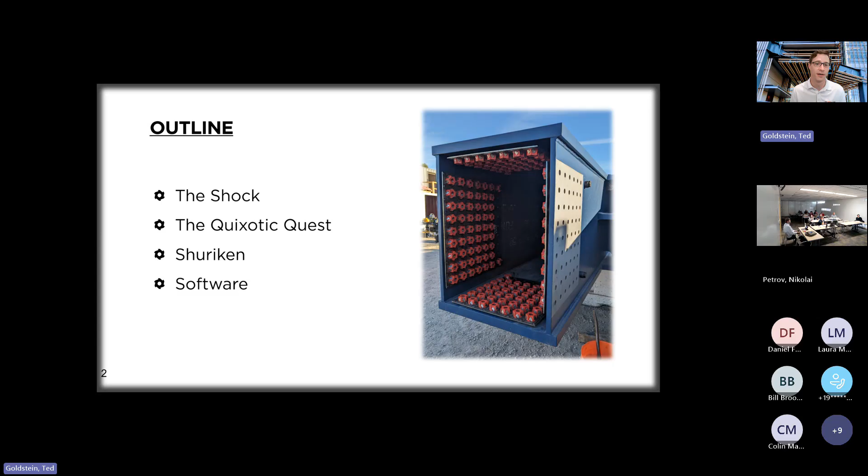To set the scene, for several years I had been working as a consulting engineer in New York, mostly working on buildings. Around 2018, my wife got a job opportunity over in Japan, and we decided to go over there for it.

In truth, I wasn't too thrilled with it at the time. Between licensure and language, it seemed like I was going to be an unemployed structural engineer for the foreseeable future. It was a bit bittersweet, but it turned out to be a really eye-opening experience.

When I was working, and I think this is true of a lot of people doing a lot of work, you kind of assume that the stuff you're seeing, since you've been doing it for a while, you've seen it all. So specifically in this case, I assumed that since concrete is the same and steel is the same in Japan, then structural engineering is also going to be the same. That turned out not to be the case.

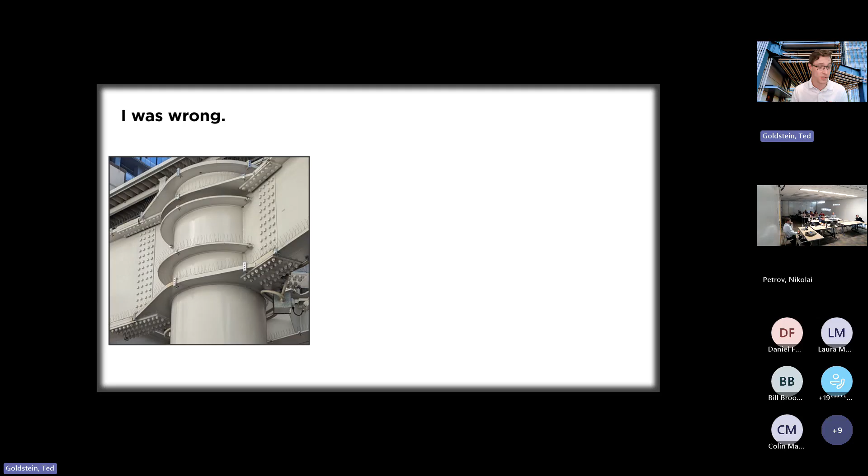I'm going to throw up a few images here of some interesting structures just to set the scene about how different it can be. Here, for example, is a big old moment connection at a major rail station. Obviously very different than how we would do something like that here. They've got all these diaphragm plates cutting through each other at every height of every beam going into the column. A lot of round columns too, also something we don't really see in the US very much.

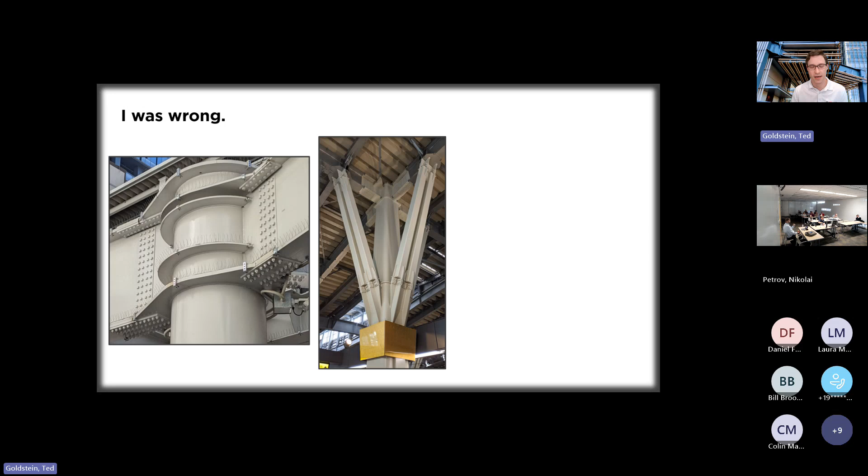Here we've got some double BRBFs, again at a large train station, going very steeply up to a moment frame supporting the roof, very different from anything I had seen at the time.

So totally different than anything I'd ever seen in the U.S. Steel is the same, concrete is the same, physics is the same, but that doesn't mean people are going to do things the same way. It's actually funny, in this particular example, I spoke to a Japanese structural engineer who explained to me that this was often done as a value engineering option for buildings, which to me was hard to even believe.

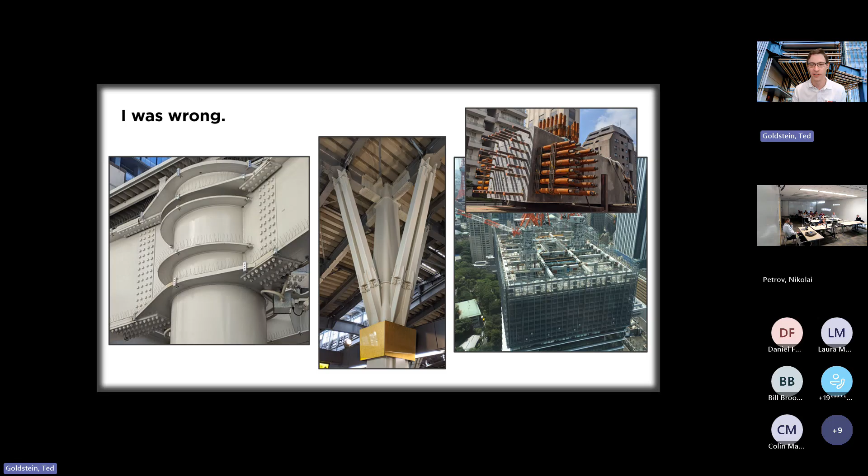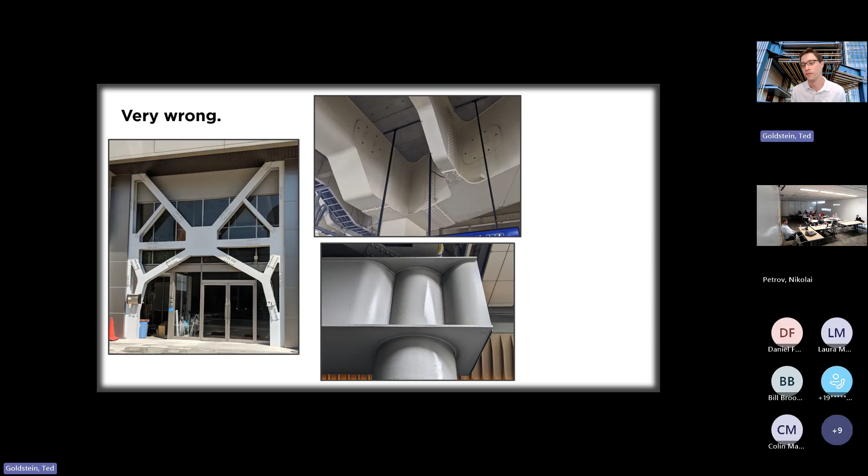And then I threw this one in, not because it's terribly representative of any particular aspect of design and engineering over there, but because it had a certain je ne sais quoi to it. I can't imagine ever seeing a connection like this done this way in the US. When you really step back and look at what they were trying to do, there is a certain method to this madness, but it's a very different madness than we would probably put into place here in the US.

So really, seeing all this definitely gets the imagination going, gets you thinking about things in a way that - at the time I'd been working about 8 years - it was sort of tempting to start to think you'd seen it all, and clearly you hadn't.

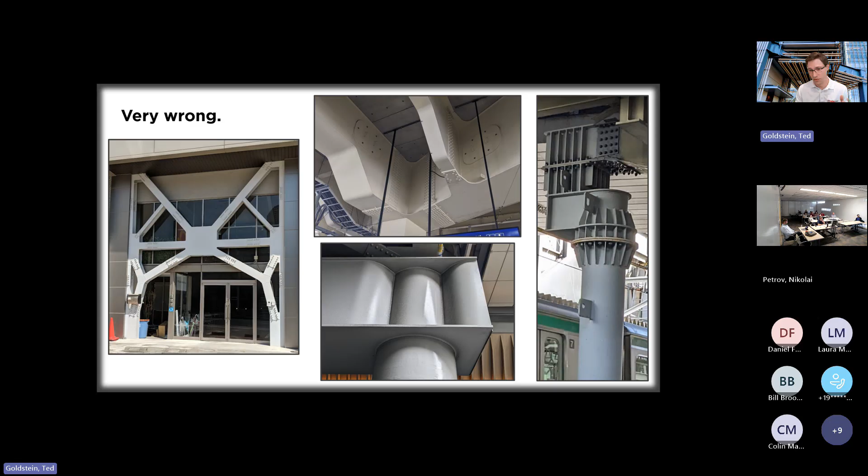Now, all the stuff I've been showing so far is, well, there's the retrofit on the left, but for the most part infrastructure, just because that's where things tend to be left open to view, so it's easiest to see structures and compare things there. But my background is in buildings, and that's no less interesting a place to examine, and that's what we're going to look at for most of the time.

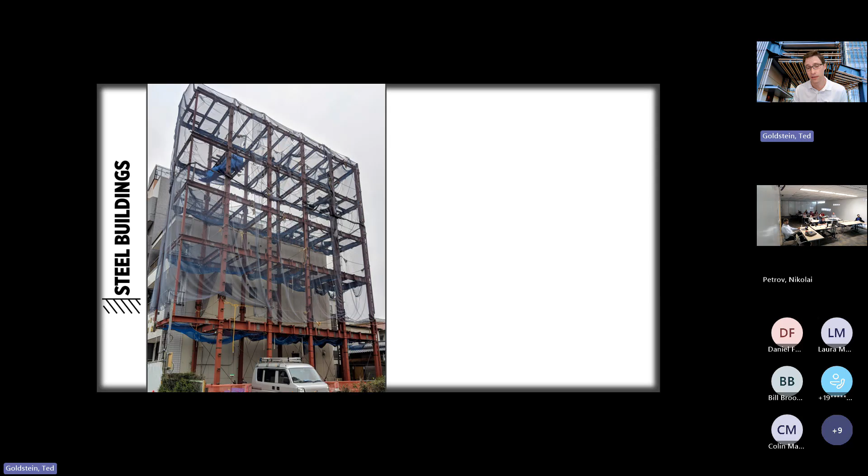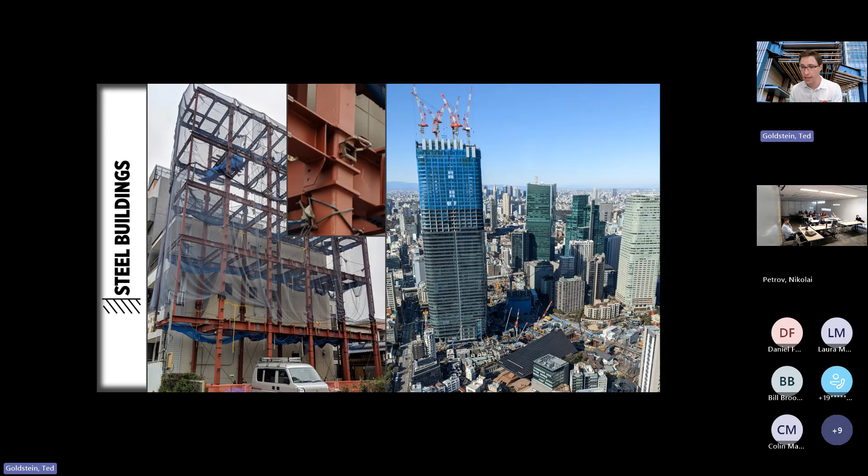For the building on the right, because of the state of completion it was in, I don't have a great shot of one of those joints specifically, but here's another example of a column from a high-rise project, maybe not quite as large as this one. Again, we've got an HSS column - when they get very big, they go to built-up boxes, but almost always square and hollow.

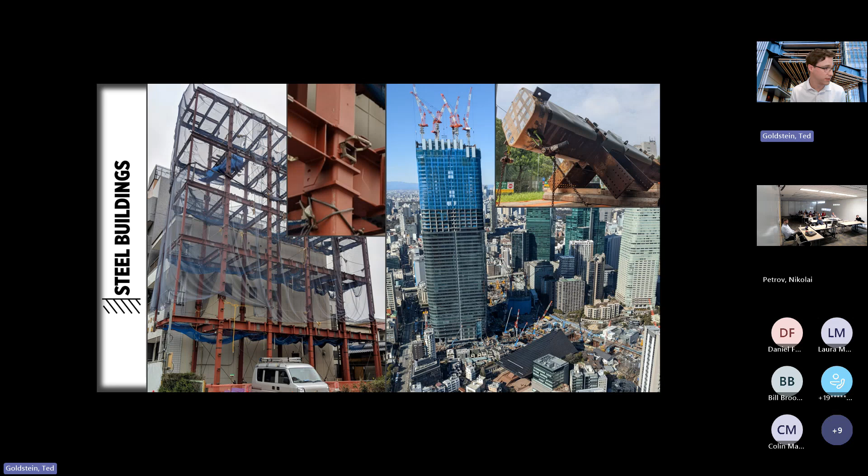They've cut that column into multiple pieces in order to slide diaphragms into them, re-weld the column, attach the stubs, and then splice those stubs to beams in the field. So with that, let's compare this with what we tend to do in the US.

In Japan, we've got distributed lateral systems where basically every column is taking part in the lateral system, and indeed every beam that is on a column line is part of it as well, which means there are no gravity columns - very unusual from an American perspective.

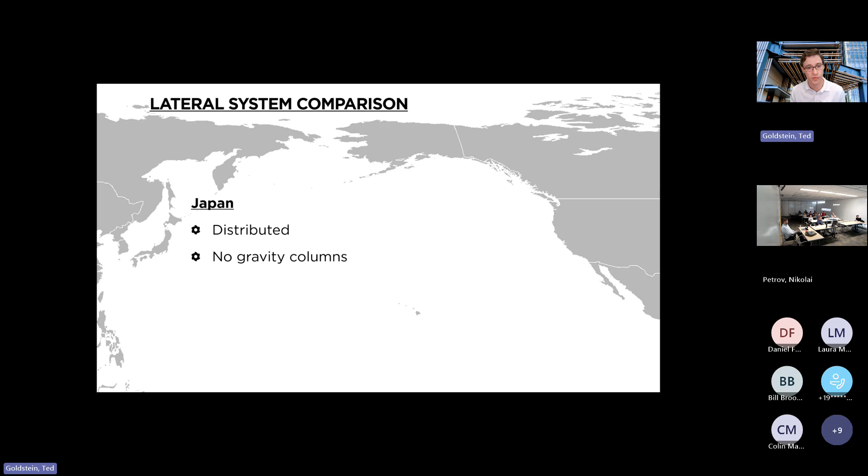Because you're distributing load over so many more connections, you tend to have more but smaller lateral connections from beam to column. This is in a relative sense - the seismic loads in Japan are practically off the charts, so the connections may not actually be that much smaller than we're used to seeing in the US. Of course, Alaska has very high seismicity as well, but from a national engineering community standpoint, they tend to have larger forces.

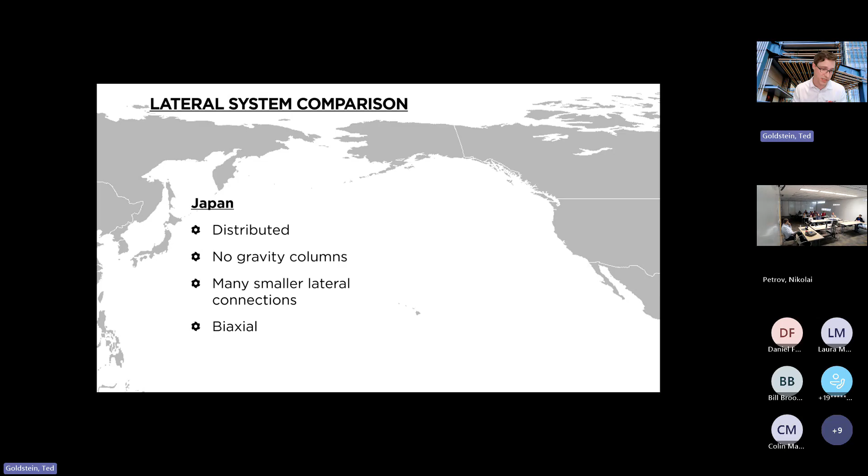And then the last thing is, of course, these frames are biaxial, right? Every column is not only participating, but it's participating in both the X and the Y directions.

In the US, on the other hand, we tend to have concentrated lateral systems - whether that's a core in a high rise, maybe some outrigger trusses, concentrating that function of moving the overturning moment out to the perimeter of the building, or in our shorter buildings, we tend to want to keep our lateral systems on the edges. Usually the idea is to reduce the effect of accidental torsion. These are obviously generalizations - there are plenty of buildings where this is not true, but more often than not, this is what we tend to see in the US.

As a result of that, we have a lot of gravity columns in our buildings that aren't participating in resisting lateral loads. That means the fewer connections we do have tend to resist more force. We also tend to separate X and Y - we'll have a frame that does one direction and frames that do the other, but generally they don't interact. If you have a core in a high rise, that acts as a tube and takes force in both directions, so that last point tends to apply more to shorter buildings, but it's a characteristic we see often.

We've got two very different ways of approaching basically the same problem: make a steel building that doesn't fall down when you push it sideways. There are a couple ways to look at this. Maybe the simplistic way is to say, well, they're doing it wrong - that's not terribly satisfying, there are plenty of smart people over there. The other way, equally unsatisfying especially sitting in our seats, is to say we're doing it wrong, and you too, Hawaii.

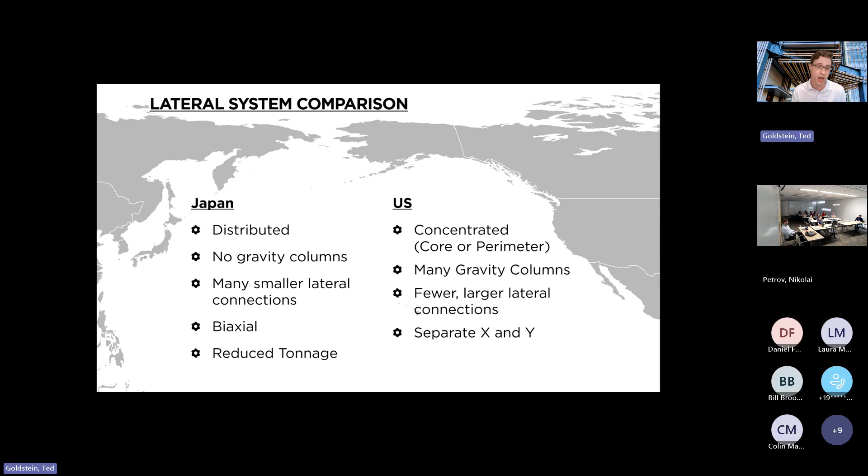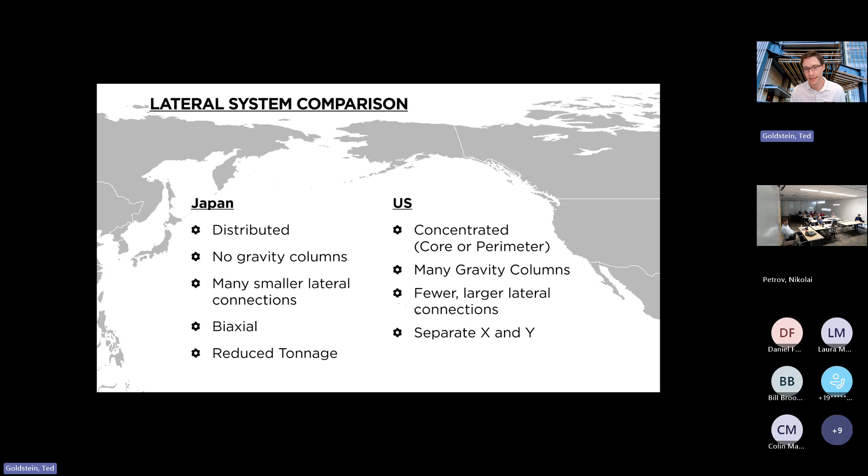When I was looking at this, I focused on mid-rise or lower-rise buildings where we tend to separate our X and Y lateral systems. In those specific cases, there seemed to be a pretty strong argument that the Japanese approach would allow you to reduce the tonnage. Of course, it comes with more connections, so cost is a much more complex thing than tonnage. But with an increasing number of projects concerned about sustainability, the best thing you can do to reduce the impact of a project is to reduce the amount of stuff you use. That's what got me focused on this approach, and really started what I'm calling the quixotic quest to see it get wider adoption in the U.S.

Just to illustrate this point, I want to look at a conceptual building. This is very much qualitative, and conceptual - it's inherently oversimplified as I go through this. Really just an attempt to describe things in a graphical way. Am I missing some details? Absolutely. But I hope that by running through this, I'll be able to get across the way I was thinking about it at the time, for better or worse.

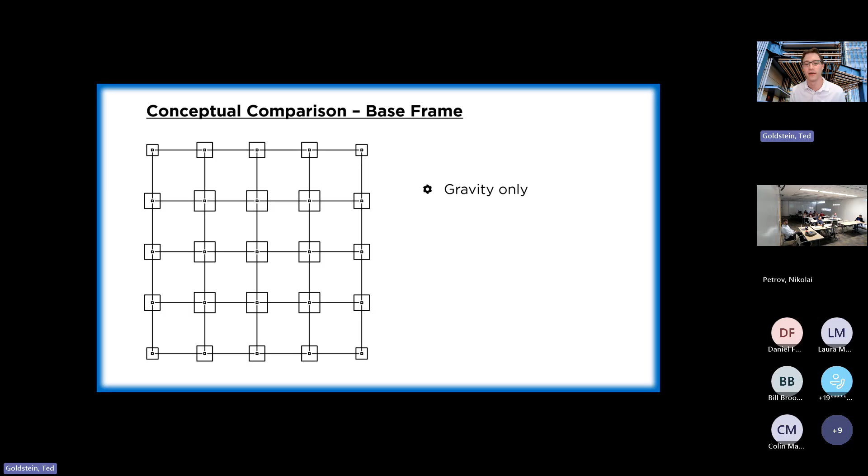So we can imagine, what if we designed a building - say a 5 to 10 story building with a very regular grid. In a conceptual example, you don't have to worry about people getting between floors, so assume everything's perfectly regular, and we're designing it for gravity only. If we design for gravity only, the footing size and column size are going to be relatively proportional - the tonnage in the column and the area of the footing are both relatively in line with one another. So we can use that as a graphical tool for understanding how much capacity we have and how much material. I'm treating the footing size here as a graphical representation not only of the foundations, but also of the material in the columns.

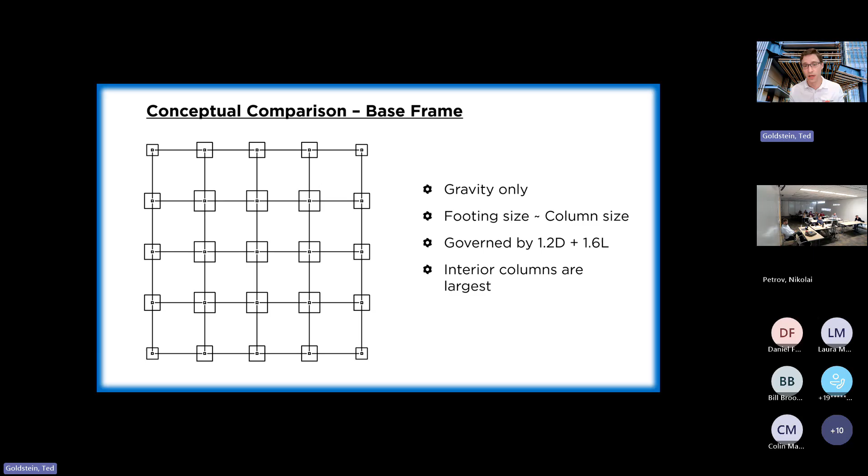If we design this for purely gravity load, then these footing designs and the frame design are going to be governed by the 1.2 dead plus 1.6 live combination in LRFD. The interior columns will be the biggest because they're picking up the most floor area, slightly smaller at the perimeter where you've got half the floor area plus some facade. The columns at the corners will be the smallest, with the smallest floor area, but they have the same amount of facade as the perimeter columns.

So we've designed it for pure gravity loads. If we now look at the lateral load combination - I'll say the wind load combination, but it really doesn't matter whether it's wind or seismic. I put wind here because wind happens everywhere, but seismic does not really.

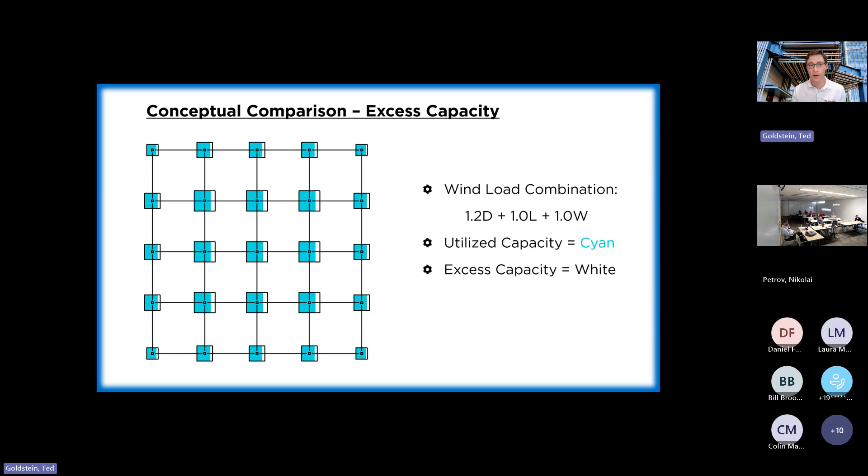But if, before we've applied any lateral loads to this structure, we were to look at that lateral load combination, the live load factor has gone down from 1.6 to 1.0, and the wind load doesn't exist yet. What that means is that all of these elements, the columns, the foundations, and the structure, are now loaded below 100% utilization. That aqua color is meant to illustrate, qualitatively, the amount of capacity you're actually using in these columns and foundations, and we can see there's some extra capacity in white.

So now if we go ahead and start applying some lateral loads, let's produce a lateral system, we can moment connect all the columns. I'll look at the distributed approach, what they do in Japan first, because it's a little simpler. If we started with zero lateral load and gradually applied it, like someone pushing on the side, when those loads are small we won't have to do anything beyond make the connections to resist them. Nothing needs to be upsized, because all of these foundations, columns, and beams have extra capacity from that lower factor on the live load.

We can look at this graphically. If we introduce a wind load, represented by this red box (oversimplified, just to get the concept across), part of that wind load will be taken up by the excess capacity we have in the columns and foundations. If we take all those white rectangles from all the foundations and stack them up, that's the amount of load addressed merely by utilizing that extra capacity. What's left is the amount we'll actually have to add material to resist. The nice thing about a biaxial system is that if you add the material needed in the X direction, you've automatically taken care of the Y direction. This case is unusually symmetrical, but the general concept is there.

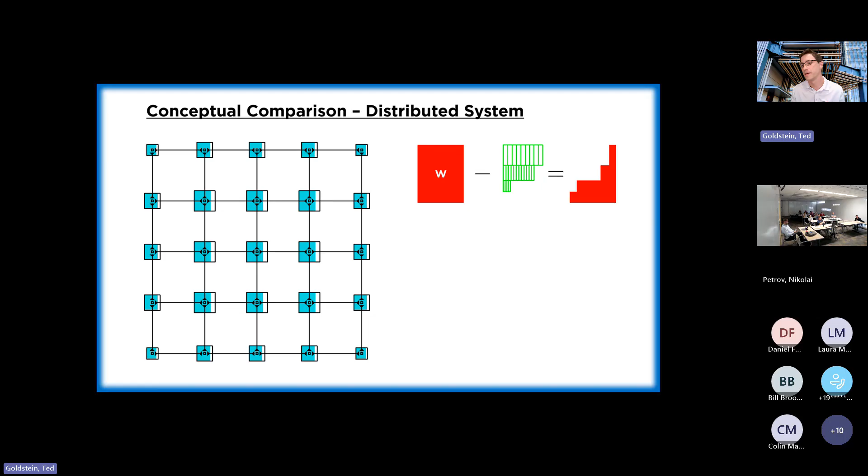So that's the distributed case.

Now let's look at what we often do in the US. I don't know if it's a majority of the time, but it's certainly common to see buildings laid out like this, with a lateral frame on the perimeter, with separate X and Y directions. Sometimes the corner is incorporated to make the frame wider; sometimes engineers leave it out because it's harder to resist uplift there with a smaller footing. For this conceptual comparison, it won't really matter.

But suffice to say, if we take this system and apply wind in the X direction, we'll still have some excess capacity before adding material, coming from those footings, but it'll be a lot smaller than before. So pretty soon we'll have to start adding material to those frames to resist lateral load in that direction. We can do the same for the Y direction, but in this case it's a totally different set of columns, foundations, and beams participating, so we'll need to add material to them separately.

So for comparison, that's the distributed system above, and the sum of those two blocks is the discrete system we often use in the US below. Again, I can't stress enough this is oversimplified and qualitative, but I think it gets across the point of how using members in two directions is helpful, because you don't have to build essentially two lateral systems and add the material for that.

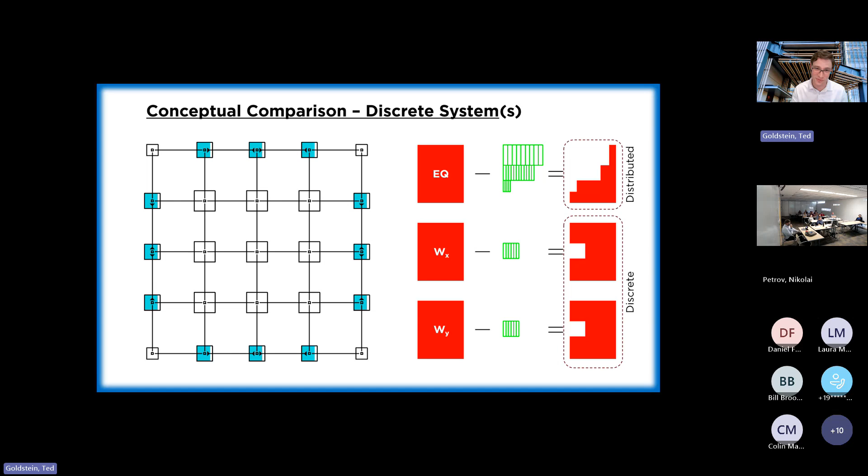I want to emphasize that just because this is a useful system in this specific example I'm bringing up, doesn't mean it's justified to be used in practically every building the way it is in Japan. As a case in point, I have some fun images of when maybe it was taken a bit too far. I'm not sure that those books or that playground equipment really required them to cut the columns into pieces and put diaphragms in there and make full capacity moment connections. But such is the allure of the familiar, right? That's how they tend to build things, and so that's how they do it.

Certainly not suggesting that we are any more guilty of it than anyone else, but it's a normal thing to just kind of stick with what you're used to, even when there may be better options out there. So that essentially, for better or worse, is why I found myself figuring out how to make this system, if not a prevalent system in the U.S., at least an option that people can look into when the time is right.

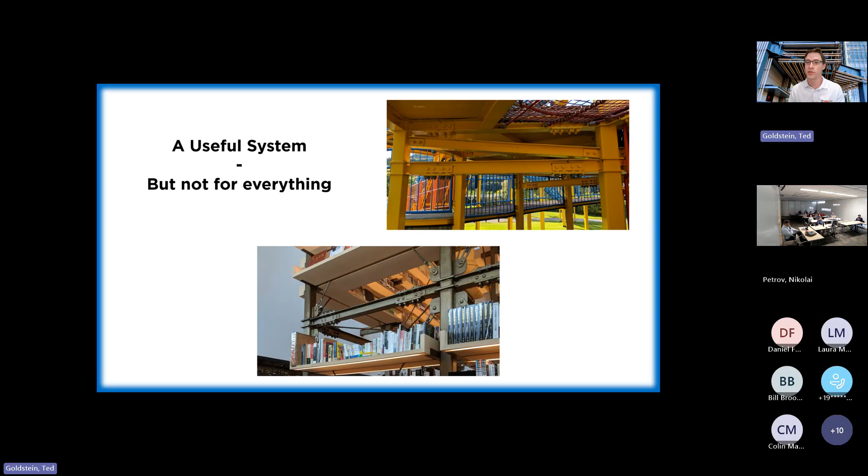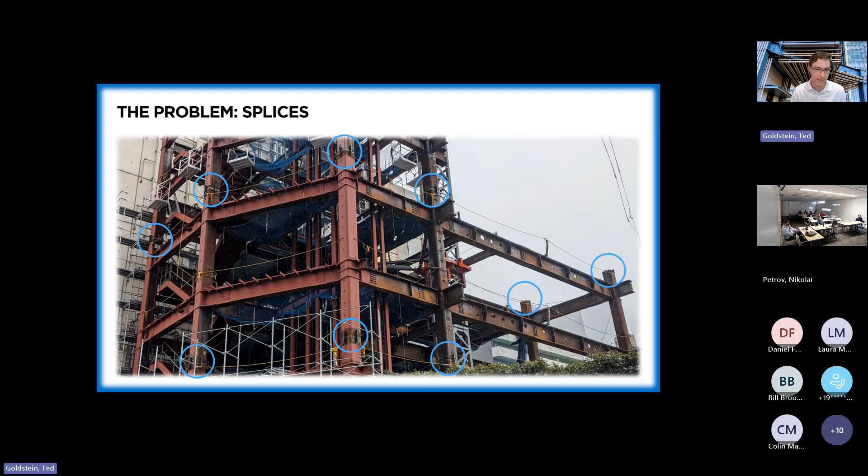But there is a big problem, and that is when it comes to splices. Here's another very typical construction site in Japan. We've got all the features we've seen before: the HSS columns, moment connections, every beam at every level. But here we can see all the splices required in this system. And because generally speaking it's very difficult to bolt things together with HSS, or at least it was, these are all going to be welded splices.

Now, in some parts of the US where you're in very high seismic zones—and I'd be curious to know what the standard practices are in Alaska—I know in California there are locations where even if you have a wide flange column, there's a good chance you're going to be welding the splices. But for the majority of the country, bolted splices are the way to go. And if you say, hey, there's this great new system, but by the way you have to weld all the splices, you're kind of likely to get laughed out of the room.

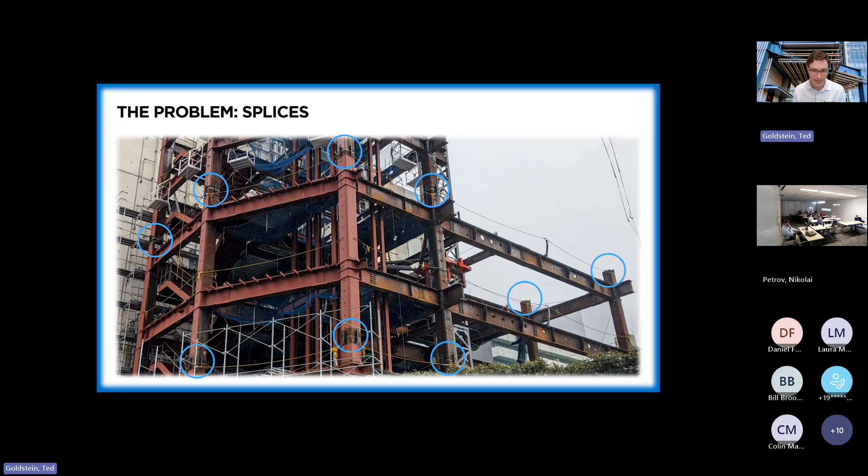And so that's what kind of got this quest going, to a certain extent—maybe that's overstating it—but this hope to find a way to utilize bolted splices at these locations, so that the benefits this kind of system has in certain situations can be realized over here.

So if we look at what a bolted splice for an HSS column would be, it's not so different from a wide flange. In this case, I'm showing it with splice plates on the interior. They could just as easily be on the exterior. But the nature of the problem isn't really changing, right? You don't have access to the interior of the tube, so how are you going to get a bolt in there and get it tightened? Of course, usually we're using TC bolts, but even with a TC bolt, you might tighten it from one side, but you still have to insert it from the other side. So the challenge remains.

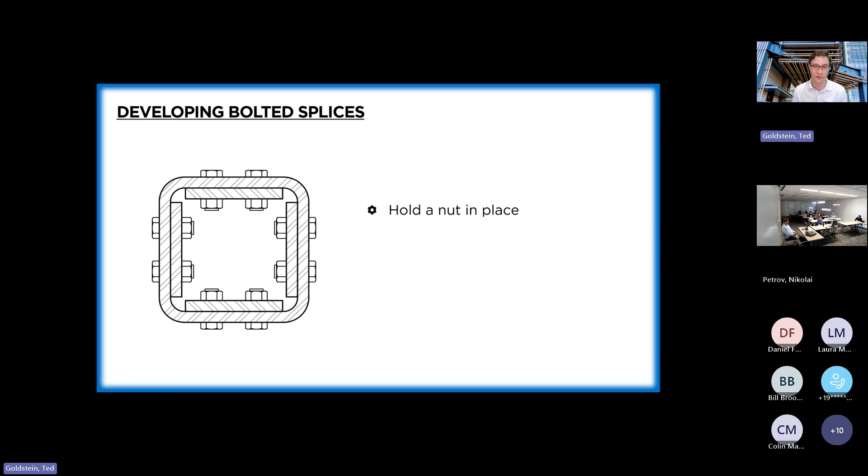So, some basic features of what you need to achieve this: obviously you need to hold the nut in place—Nikolai was talking about tack welding nuts, we're going to touch on that a little bit later. That's the most basic requirement. You also have to resist torque from pre-tensioning. If you're primarily thinking about column splices, even if the code does not strictly require them to be pre-tensioned, most engineers are going to want their column splice bolts to be pre-tensioned.

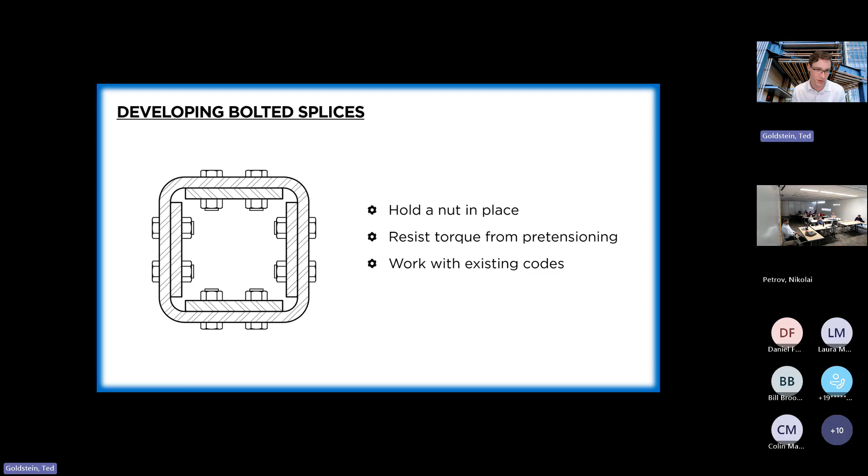And you want it to work with the existing codes, right? There were already nut holders that existed for sheet metal and automotive and things like that. But they tended to do things like have extra layers within the plies of the connection that don't really work in the structural world.

And lastly, we have to allow for erection tolerance. That goes back to that example of tack welding a nut. One of the beautiful things about bolted connections, aside from being faster to assemble, is they've got a lot of tolerance compared to welded connections. So it's much easier for erectors to get things to fit and get those connections finalized when you have that tolerance.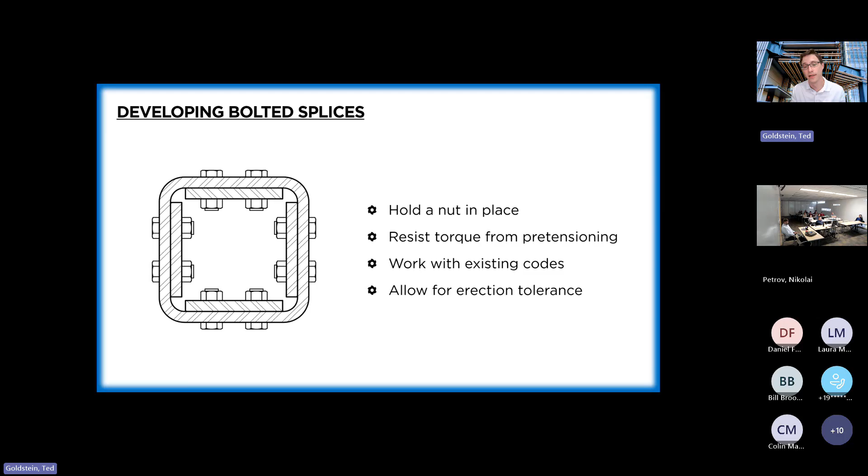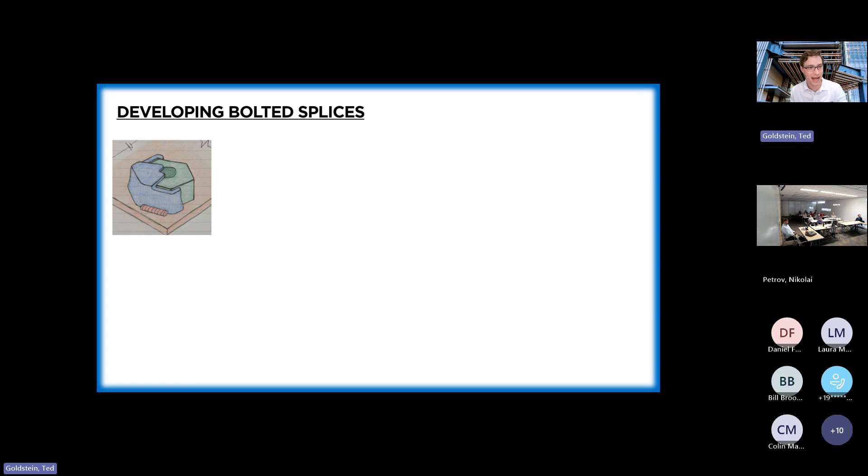So with that, we went from the basic concept through a whole bunch of inadequate ideas. Essentially, we started out with drawings, which gave way to models, which gave way to patent images and that sort of thing. Cast steel gave way to sheet metal. And with each iteration, you bring up new problems that you have to try to figure out how to deal with.

The one up here is one of my favorites because of how ridiculous it is. The idea was to let that part in the middle move for the tolerance. But when you start putting torque on it, those kind of squiggly parts will straighten out as you resist the torque. The problem is that if the person inserting the bolt pushes too hard, it's just going to move upwards and the nut will fall out.

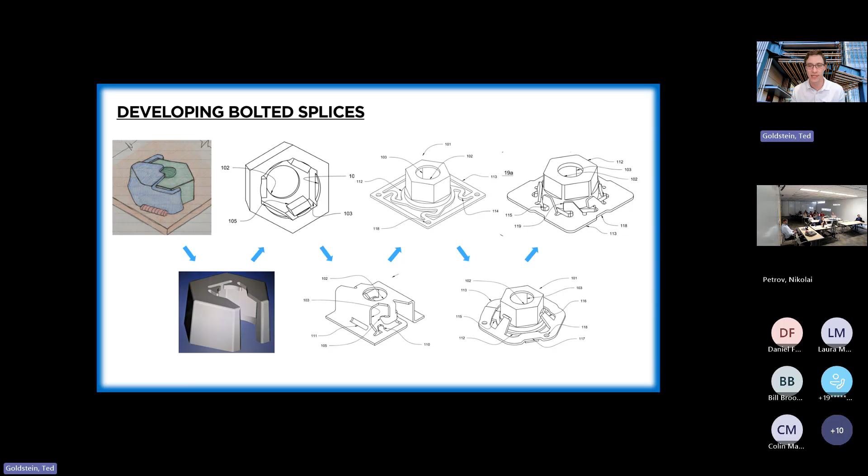So each of these is an effort to address the shortcomings of the previous one. We went to two pieces, and then finally that piece in the center went from being a steel sheet metal piece to an injection molded piece just for manufacturing reasons. At that point, I had conceptually arrived at the geometry that would eventually become Shuriken.

So I'm going to move away from the narrative now a little bit and talk about Shuriken itself. I want to pause and note, obviously this is a product we sell, it's a product I manage, so it's difficult for me to be 100% objective. I do think it's very useful, but I want to acknowledge that while this is a great tool to have in the toolbox, it's far from the only one, and it doesn't mean it's the right choice in every situation. I'll touch on that more towards the end.

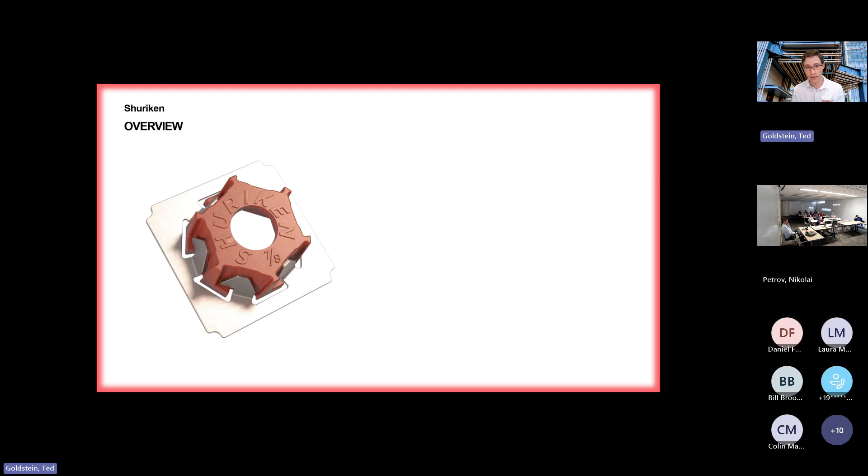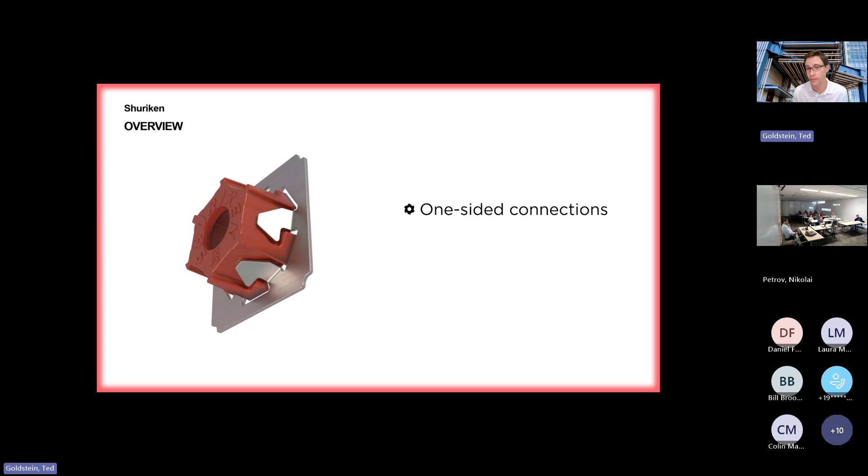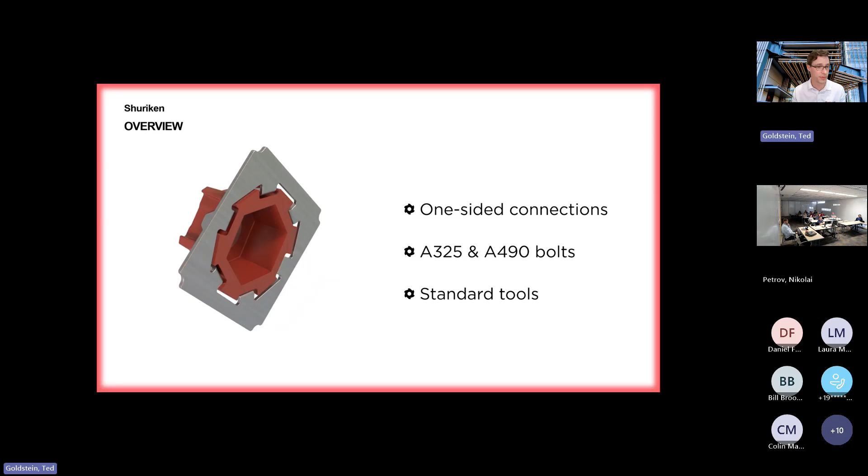But with that out of the way, a bit of an overview of Shuriken. As we said, this is a way of making one-sided connections when you can't access the interior, specifically originally talking about column splices. Because you're just holding a standard nut, you can use standard bolts, A325, A490 bolts. They can be fully pre-tensioned, and once they're in the field, the erector is going to be able to put things together with standard tools.

So how does it work? Basically, it's kind of like a one-time use wrench, one of the best ways to think about it. You have a socket, like in a socket wrench, that's going to hold the nut in place in that cap in the center. The teeth in the cap interlock with tabs in that steel ring around the outside, and then it gets tack welded down to whatever you're working on.

So when you apply torque to the nut, that's going to twist the cap, and it's going to get resisted by those tack welds. The other thing we'll talk about in a bit is how part of that steel ring, those tabs, are flexible, and that's the part of it that allows for tolerance in the connection.

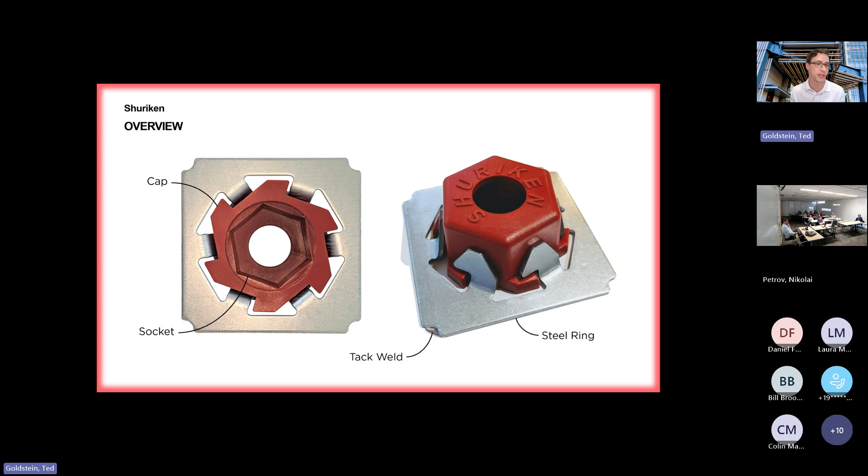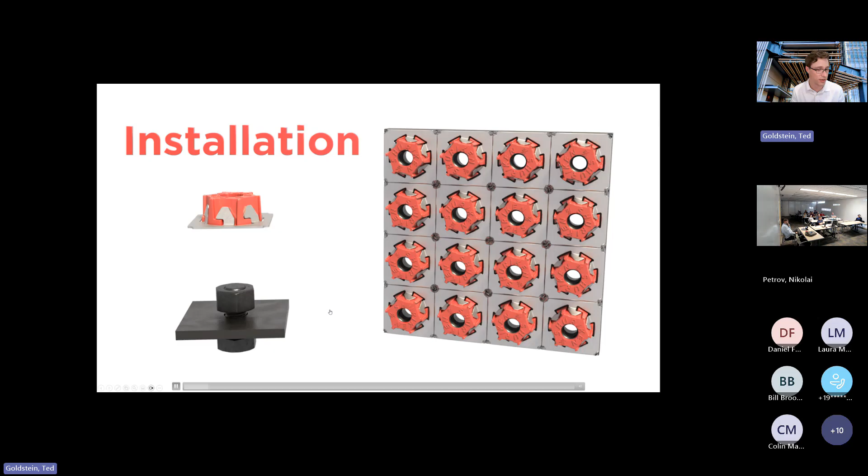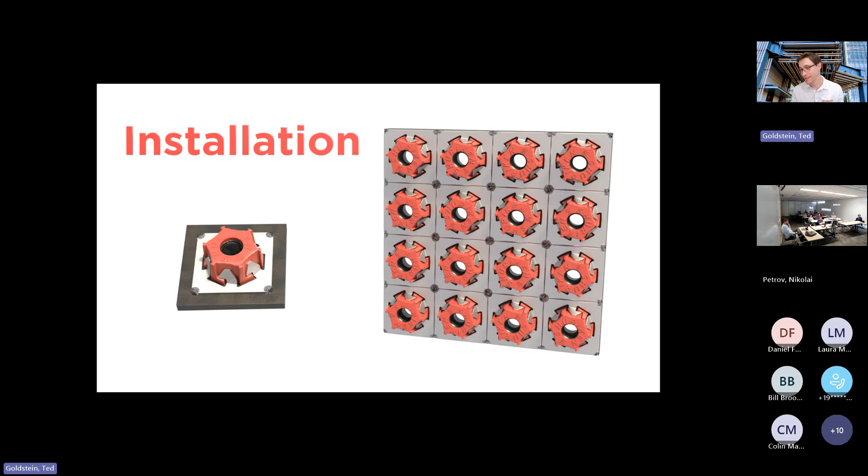I'll do a brief video here just to show you how they're installed and the basic connection geometry. Essentially, we're going to hand tighten the nut and bolt in the shop just to get the nut in the right spot, roughly over the hole. Tack weld the four corners of Shuriken, and then you can pull the bolt out, and now you're adequately centered because of the adjustability, so you know it's going to be in the right place.

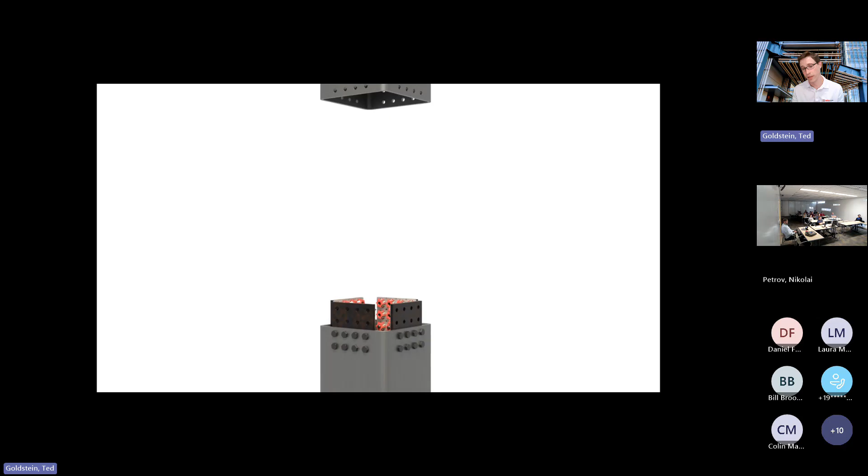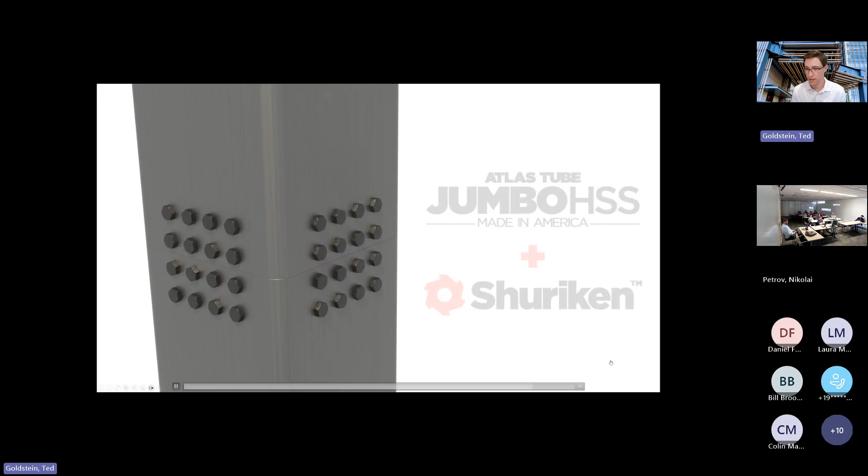At that point, once you've fabricated the plates, you can slide them into the tube, shop bolt one side, and then in the field, when the next portion of the column comes into place, drop it on, and you can field bolt the other side. That is, in very broad strokes, how it's used. So, move on to the next slide.

Okay, so configuration, just a bit of technical detail to get out of the way. We just saw the left side of this image was the Shuriken getting mounted with the nut on the inside. We're fastening two or more plies of material, and then on the right side we have the bolt. If it's a snug tight connection, the bolt is all you need. If it's going to be pre-tensioned, then we need DTI washers, strongly recommended in order to verify that tension from the outside.

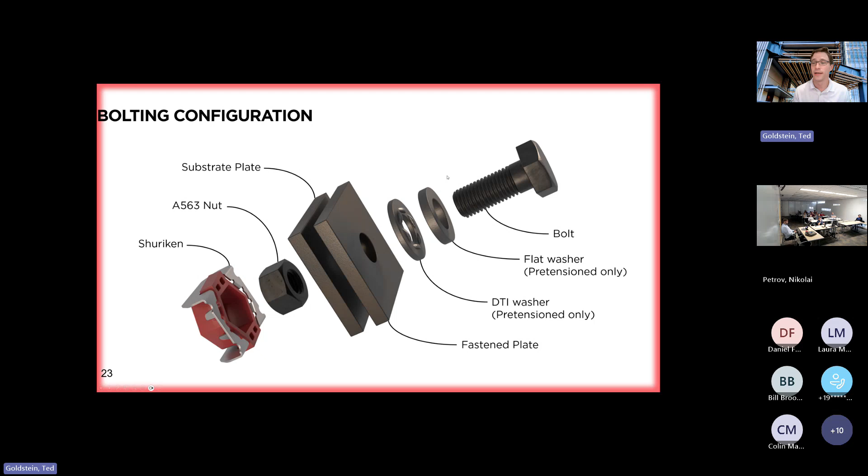So we talked about tacking nuts. It's one of the most common questions that comes up, so I want to address it here preemptively. A few things to consider when we look at taking that approach. First of all, the code is complicated. I think there's this conception that the code does not allow you to do it. It's not quite that cut and dry.

If you look, for example, at Design Guide 21 from AISC—it's funny, actually, it's called a welding primer for engineers, but it's like a 300-page primer—they actually have a section on welding nuts and bolts, and they do give guidance where if you really had to do that, you could do it.

There are best practices to do it properly, but the problem is that it's pretty onerous. You've got to preheat, but make sure it doesn't get too hot, use a particular type of electrode, and not put too much material down at once. In the end, if people are tacking nuts in a shop, they're not going to do all this stuff, and if you don't, the result is you get a brittle weld. So if you're in the field and things are not quite fitting, and that nut pops off because the welds are brittle, you're going to be in a difficult situation.

With the Shuriken, you have that sheet metal cage, which is a much more ductile attachment. It could get deformed a little if people are particularly vigorous in getting the bolt into place, but it's not going to get knocked off.

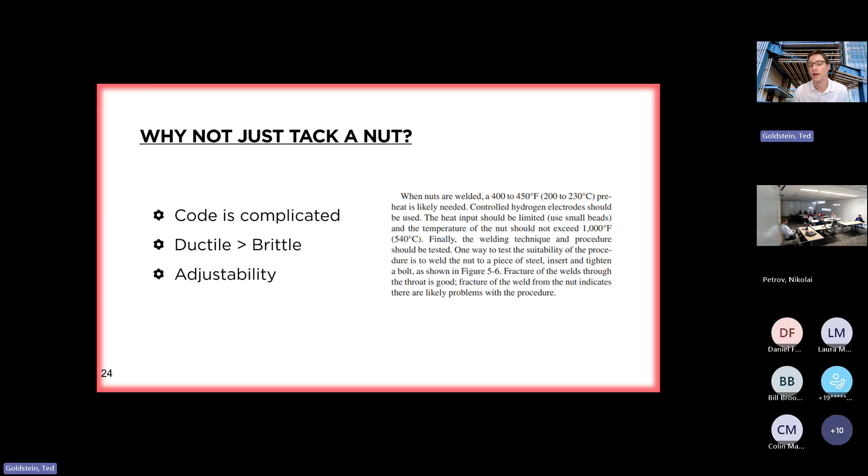But the biggest issue is adjustability—being able to make sure that you don't need things to fit perfectly together in order to get the connection to work. So here's an image of a nut where you can see the holes are not quite perfectly aligned. The Shuriken itself is also installed a bit to one side. But in a situation like this, an erector can stick a spud wrench in there and just push it whichever way it needs to go.

So the idea here is to always have enough flexibility that regardless of which edge of the hole it was installed on, or which edge of the hole the bolt is coming in, you're going to be able to thread the two together.

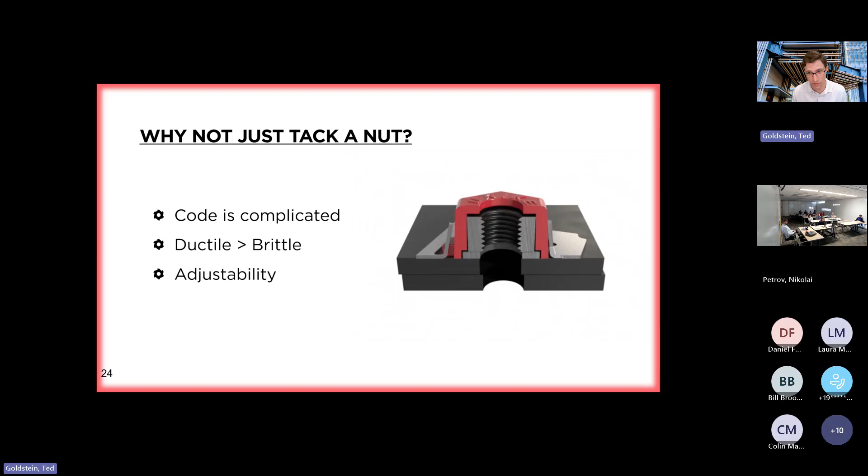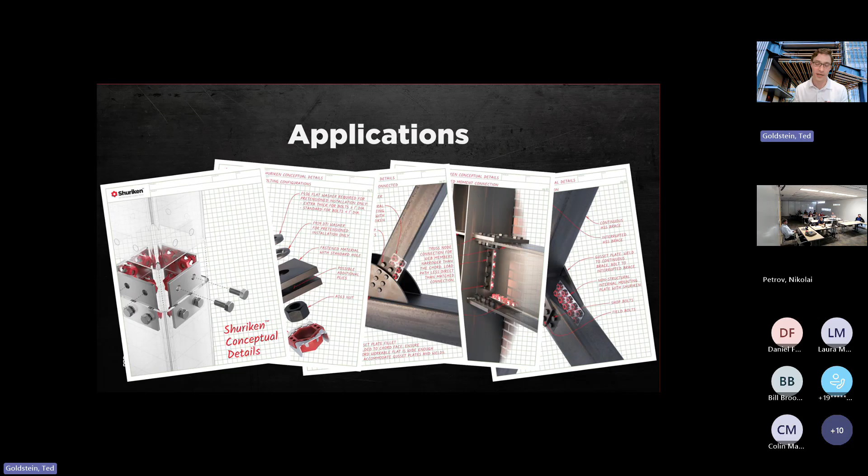Now let's talk a little bit about some applications. Up until now, I've been talking all about column splices, and for the longest time that's really all I was thinking about, and even after Atlas Tube became involved, that's all we were thinking about with this product. It feels almost silly in retrospect, because thanks to the inventiveness of the engineering community, we've learned so many other ways to use it—you find yourself constantly saying, why didn't I think of that? But with that in mind, I want to share a few different ways you can use it, just to get the imagination flowing.

So I did talk about columns—I'll cover this briefly. If you're doing a column splice design, there are a few considerations: gravity versus lateral. Obviously, if it's a gravity column—and let's face it, we have a lot of those in the US—you're really just designing the bolted connection to hold things in place and make sure things don't slip, because the vast majority, if not all, of the load is going to be transferred from the upper column to the bottom column through bearing.

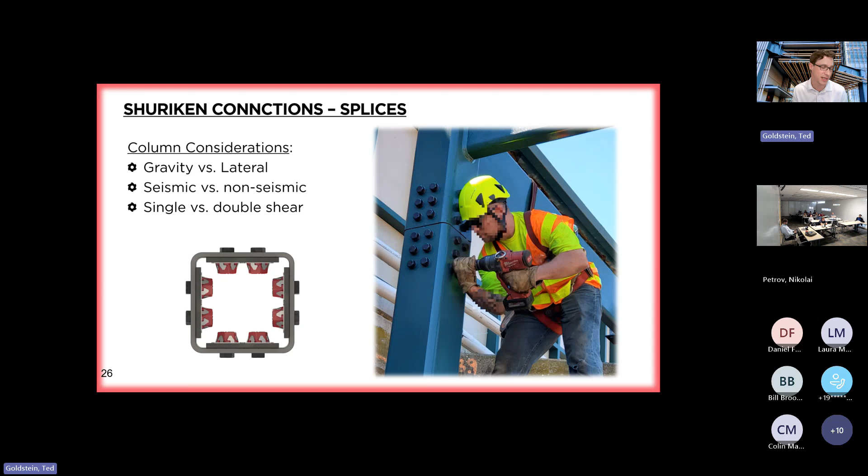Obviously, for a lateral connection, if you have moment or even tension in the column, at that point the bolts are going to be doing much more of the work, and so you may end up with more bolts, as in the example on the right, where we have a column that's part of a moment frame. And then the last thing is single versus double shear—we'll see in a minute. There are a lot of different ways you can go about making a splice, with trade-offs in terms of how easy something is to fabricate, how much material it uses, how good it looks, etc. So we'll look at those real quickly.

The basic one I showed before, the section where you have the plates on the interior, that's the single shear interior splice. That's kind of the workhorse of Shuriken splices.

If you have a case with particularly high loads, you can do a double shear version where you have a plate on the outside as well. It's more pieces, a little more effort for the erector, because they have to fit the column piece between 8 plates instead of just around 4. But you do reduce the amount of connection material, both in steel and in the number of fasteners and Shuriken. So if your loads are particularly high, this is a good option.

There's also a version for an exterior splice. The first two we looked at are great for columns or cantilevers, when you can slide a member into place along its long axis. Not so great if you have a beam, an HSS beam, with a connection at both ends, trying to drop it in from above, because if you have plates sticking out, you just won't be able to drop it into place.

In those situations, there are configurations where we attach the Shuriken to a mounting plate which sits on the interior of the tube, but doesn't actually cross the cut line between the two tubes. That holds them in place, and once the piece is erected, you can bring on the splice plate from the exterior and bolt it up.

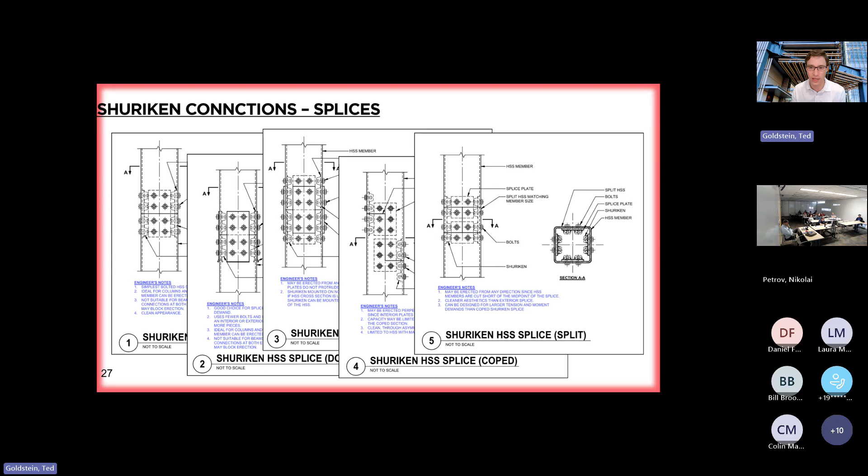There are a couple other approaches, big copes, where we have plates sticking out and cover them with C-shaped covers. These are less common, but all of them have trade-offs in terms of how efficiently they transmit forces, the maximum force they can handle, how complex they are to fabricate, etc. There are quite a few options based on the specific demands you may have, and we're happy to help choose the right one for a given project.

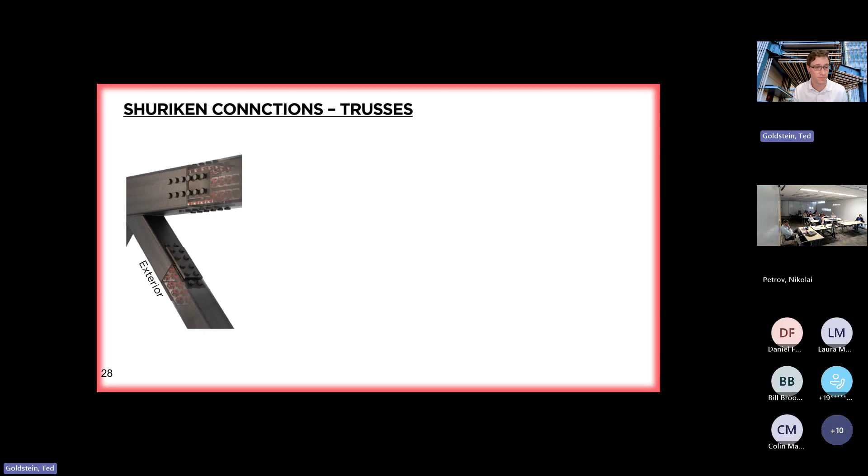A few extra examples: truss webs are a very common situation where we have that issue, where we can't slide things together if plates are sticking out. So we can do a truss web with the exterior splice. Here's an example where they did all 4 sides - covered splice, coped splice. I won't go into detail, but suffice to say, if you run into issues, there's probably a way to get around them.

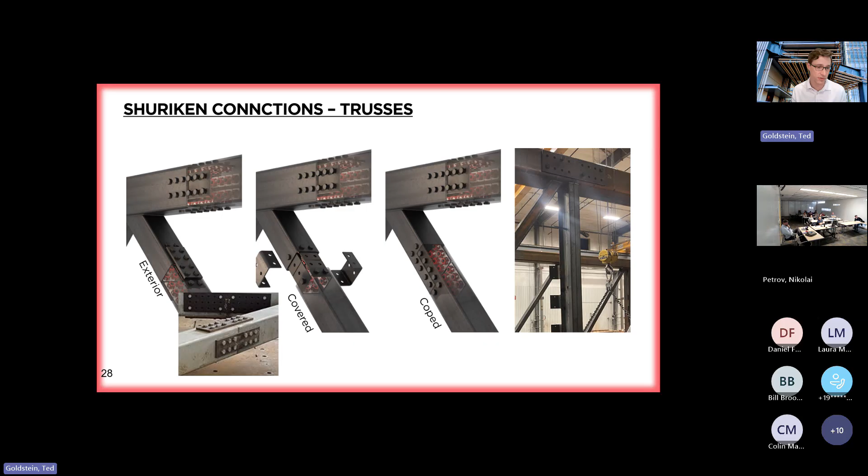One other approach, not really a Shuriken approach, but very clever, so I figured I'd include it with the trusses, is to go ahead and split your vertical member. In this case, this is a pedestrian bridge truss - they've got a vertical member right at the splice, and a channel on both halves of the truss that gets bolted together through its web. So there are always alternate methods as well.

Here's an example of one of those trusses. You can kind of see, if you can see my mouse - the chord splices are basically column splices on their sides, and they use that exterior approach for the webs. This is an overpass of a very wide freeway in Texas.

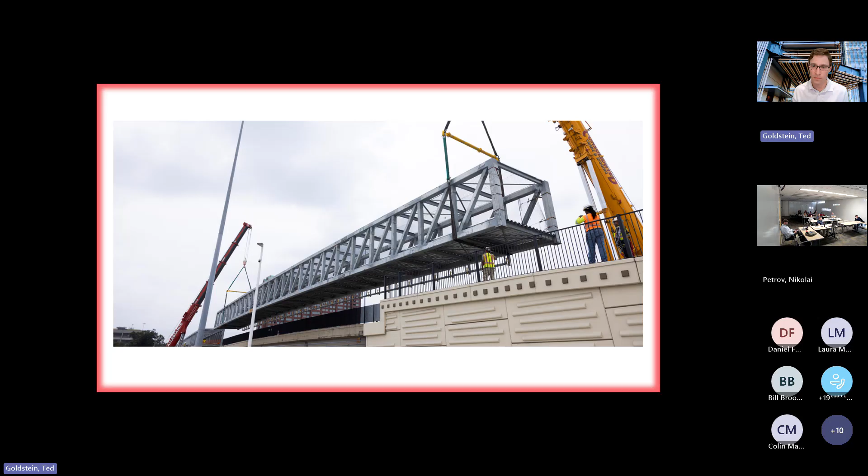Beam connections - I won't go into much depth here, but again, we have a book of conceptual details, as well as some more rigorously engineered typical details that we can share with you guys. Suffice to say, there are a lot of different ways to make a shear or moment connection if you don't have access. It's going to be based on the level of force, whether there are aesthetic requirements, whether you need the tube to be sealed, etc. So there are different options based on what you need to achieve with the connection.

One thing I'll point out on the right side here with the moment connection is we do have that mounting plate I mentioned earlier. You would put together this plate, which has 8 Shuriken on it with the nuts on the inside - it's not structural, it's essentially acting as a big washer. But by using 2 extra bolts, you can hold that plate in place. Once you've slid the beam in between these flange plates, you can go ahead and make the actual structural connection through those plates. So that's just a different way of holding things in place when you can't have plates protruding from the member.

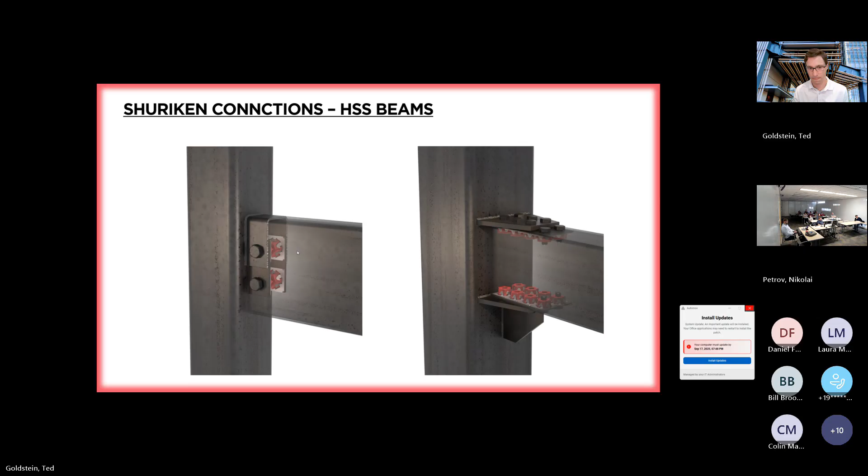One of probably the biggest examples of a why didn't I think of that moment was moment connections up against a wall. If you're in a tight spot and just can't get a hand back there, sometimes it's a lot easier to mount the nuts ahead of time and slide the beam in from the side than it is to potentially put big access holes or copes. Of course with a moment connection you can't put a cope. If it were a shear connection that would be an option, but regardless, probably easier to just mount the nuts ahead of time. It just makes things a little simpler.

And similarly, here's an example with a brace frame. We can't see the wall here because we're looking through it in the detailing model, but it just illustrates the concept.

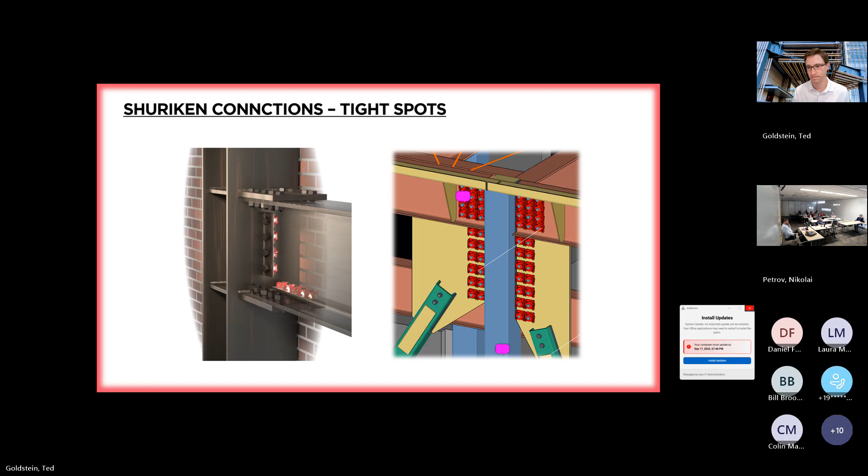So with that, I'll look at some technical concerns, things that are maybe a little different from a typical bolted connection, just to keep in mind if you have a situation where a shuriken seems like a good solution.

First of all, it's a wrench, not a fastener. It is essentially means and methods. To give an example, you could imagine, if not expect, a case where if you designed a bolted connection like the one we're seeing here on the right, instead of a shuriken, the steel erector just wants to buy a 40-foot wrench and drop it in from the top of the column. They can do that, right? Whether you use a wrench that's attached or a wrench that has a crazy long handle, it does the same job. So basically, means and methods.

We do say that engineers should spec them, simply because they're not 100% known at this point. And if you draw this bolted connection without showing the shuriken, the fabricator might think you're an idiot. But we may eventually get to a point where it's understood what you'd be looking for there.

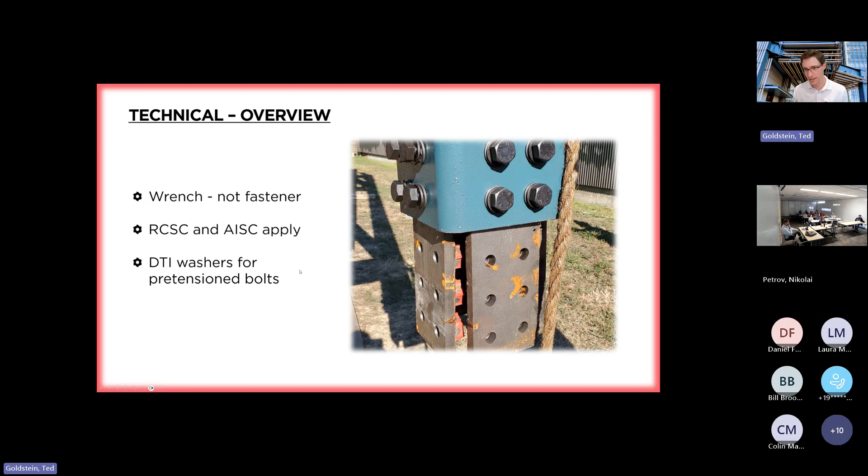So with that in mind, given that it is a wrench rather than a fastener, we're using standard bolts. You can see the A490 here in the photo. RCSC and AISC requirements for bolted connections all apply, and of course you can meet all those requirements. And then the last thing is, again, while we cannot tell the engineer what to do in terms of how they go about inspecting these, we do strongly recommend DTI washers rather than turn-of-nut, just because it's a verification method that can be done completely from the outside.

A note, if you're ever doing anything with a fatigue consideration: the shuriken is getting mounted with tack welds, and those do create a discontinuity. That's okay if you have a static load, but if you have something with fatigue, whether that's high cycle fatigue like in a road bridge, or low cycle fatigue like in a protected zone of a seismic assembly, we want to make sure those tack welds are not on the load-carrying members.

So in this case, essentially what we would do is mount the shuriken to a thin plate that is essentially neglected when the calculations are done. That way, when we sandwich it with the actual splice plate that's carrying the load, the tack welds are not touching the load-carrying part of the structure.

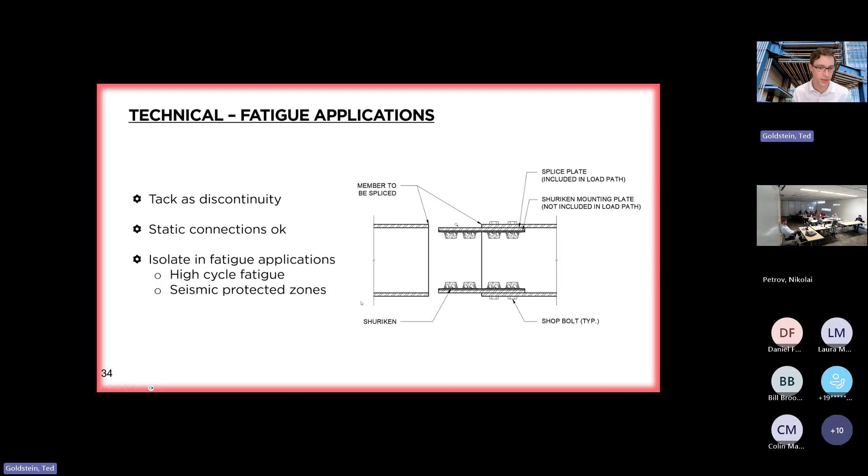A few notes just on detailing. When you're laying out a connection, we have to watch out for conflicts if we're doing something inside of a tube. Part of that is that the shuriken itself is bigger than a nut. Part of it is that we don't actually detail all that many connections that are in enclosed spaces, so often it's something the engineer or detailer may not think about.

It's happened to me more than once that someone will say we need to buy a bunch of shuriken, and I'll ask out of curiosity what they're doing with it. They'll send a detail, and I'll have to go, I think that's not going to fit. So definitely something to think about ahead of time.

For what it's worth, we do have plugins in both SDS2 and Tekla, the most common detailing software, where you can essentially pick two tubes and apply the shuriken component. It'll put all the materials in there, but it'll also check for these interior conflicts. If you'd like to do it a little more manually, we also have CAD files that we can share to help you when you're laying out connections.

Aside from that, edge distances need to be aware of. The shuriken themselves, at least the three sizes we have out currently, are all right about 3 inches wide, which means you need 1.5 inches edge distance, which is generally a little more than the minimum the code would require for those size bolts. So again, just something to be aware of as you're laying out the connections.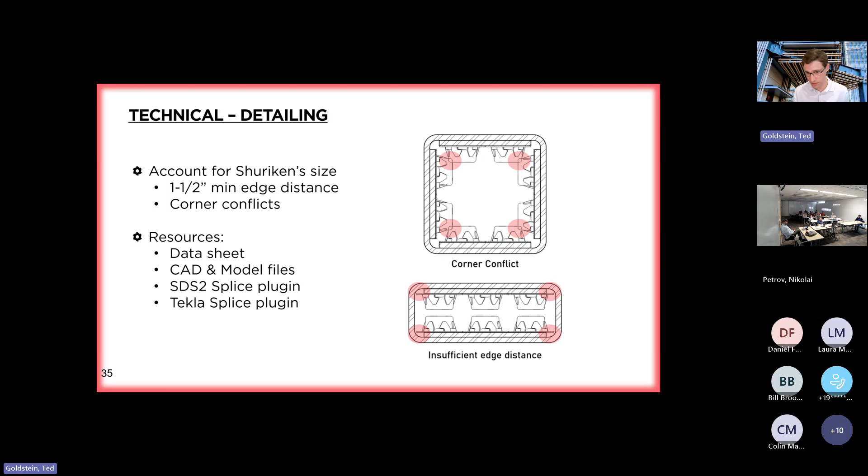And then lastly, just to give a sense of price and availability: we try to price these competitively because at the end of the day, Atlas Tube is an HSS company. The Shuriken is really just there to make it easier to work with the main product. You can see the three sizes we currently have available: 3/4 to 1 inch, and 5/8 and 1 1/8 coming available this spring. Just trying to fill out that size range.

Obviously, the 1 1/8 works when you have really big loads. The 5/8 is useful if you have a relatively small tube like a 4x4, where you don't have a lot of interior space. Obviously, 5/8 is not a very common size in the structural world, but in those smaller connections with less available space, it can come in handy.

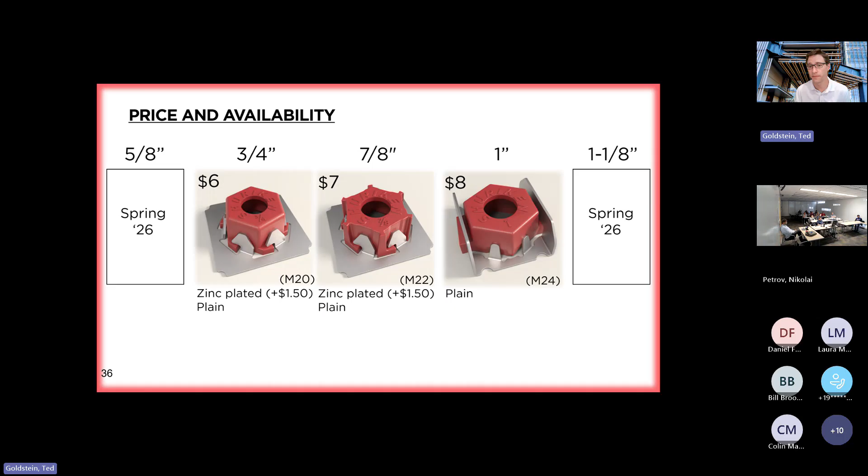So with that, I do want to return to what I said initially: Shuriken is a tool in the toolbox. It does help us solve some problems, reduce field welding, that sort of thing, but it's not the only tool we can rely on in those situations. For example, we have the hollow bolt from Lindapter and the blind bolt from the company Blind Bolt, both very viable options when you're making one-sided connections. Both have pros and cons compared to a standard bolt, but there are times when these are the right products to use.

For example, if you're attaching something to the middle of a 40-foot column, there's no good way to get in there to install a Shuriken. In that case, you really want something that works exclusively from one side. Similarly, if you have a relatively small, lightly loaded attachment, these products are very portable at those smaller sizes and will work well. As much as I want Shuriken to catch on, I do need to say that other options are appropriate sometimes.

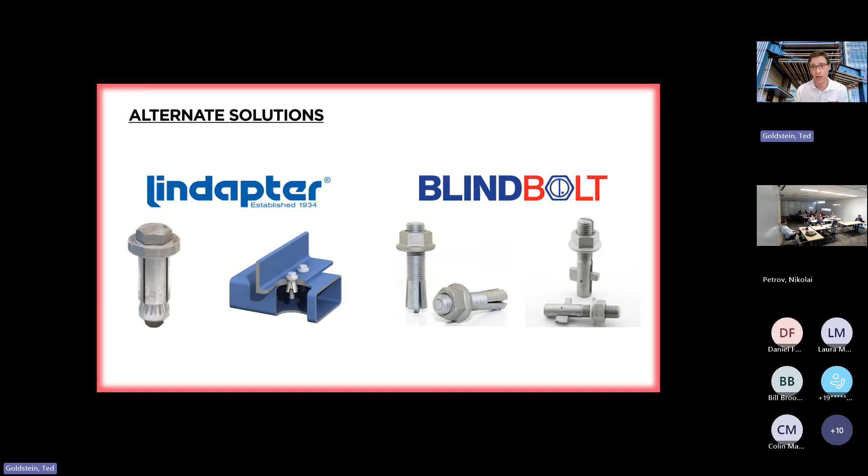So, having spent a lot of time talking about physical stuff, I want to talk about one last topic, which I hope will be helpful: the HSS Connections Hub, a software package we've been working on at Atlas Tube. Shuriken exists to solve a physical problem with the difficulty of making some HSS connections. And as much as I like to think it's very helpful, that's certainly not the only impediment to making HSS connections easier, both from a design and a construction standpoint. So this is the effort we're making to address the design side of things.

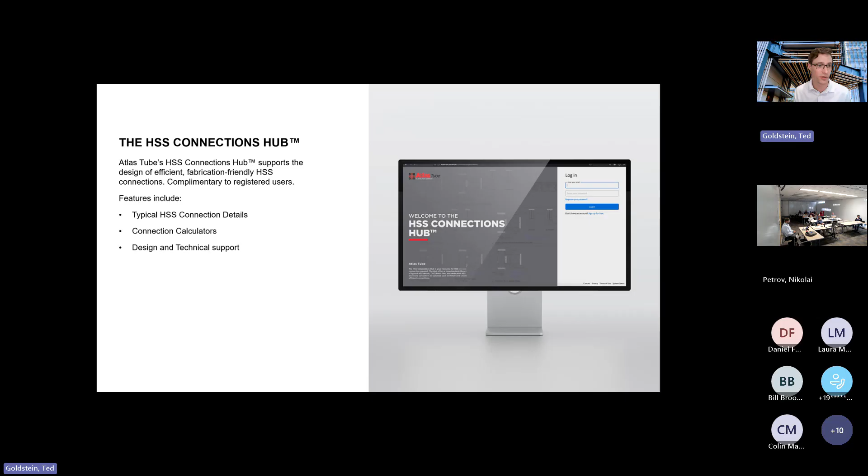So basically, you enter username, password, and you're in. The goal here, obviously, is to save time when you're doing design, and end up with a connection that a fabricator isn't going to complain about. But then also, I think an important thing is that there's an educational goal here as well.

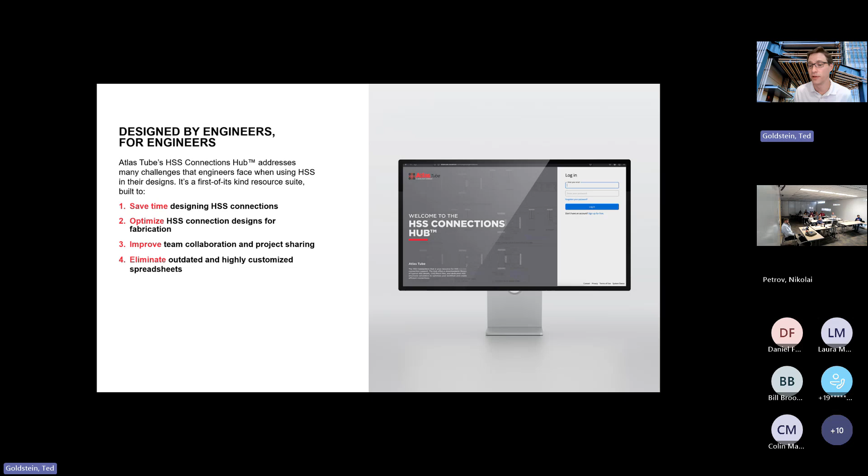I think a lot of engineers, because we spend more time using wide flange in designs, get more comfortable with it if they have more exposure. So the goal here is to provide not only an answer but a procedure to help someone doing this work understand what's happening behind the scenes.

Looking at the typical details, we have full sheets as well as individual files, organized by topic. The goal is to make them as fabricator friendly as possible. Aside from the files themselves, which come in Revit, PDF, and CAD to make it easy to get into your project, we included engineering commentary with all the details.

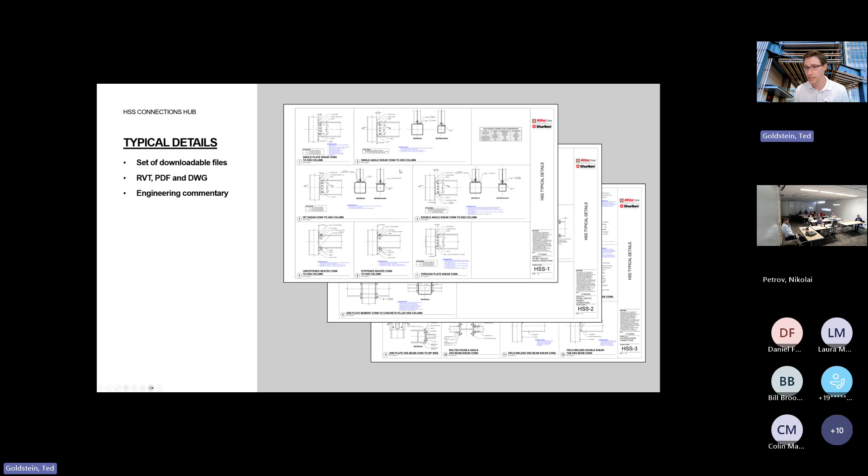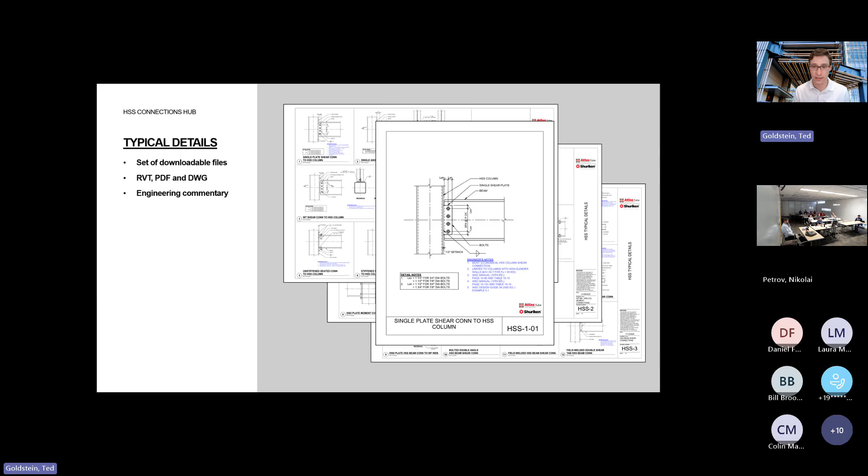You can see here in blue, we have the engineer notes. The goal is to give background on when a particular connection is appropriate, what design considerations people may need to take into account, and where they can find code references, example calculations, and that sort of thing—combining the asset with the education.

The connection calculators are really the meat of the Connections Hub. Right now, as of today, we support 48 different connections. Our goal is to get to 72 by the start of NASCC, about 4 weeks from now. At the beginning of the year we had zero, so we're moving very fast to build this out.

We're going to get through the ones on the plan now, but to the extent you think we're missing something, or that one of the calculators is missing a feature that would be helpful, we want to hear from people. That feedback is hugely important as we prioritize where we put our development effort in the future.

Another thing to highlight is that we're not building these ourselves. We're working with calcs.com, an established structural calculator company, formerly ClearCalcs. They have robust existing procedures for quality control and interface, so we know the math is right.

We're moving very fast, so admittedly there are times where the text and images might get a little jumbled. But we're very confident in the accuracy of the conclusions. Again, we want this to be not just a production tool but an educational tool and something that's completely transparent.

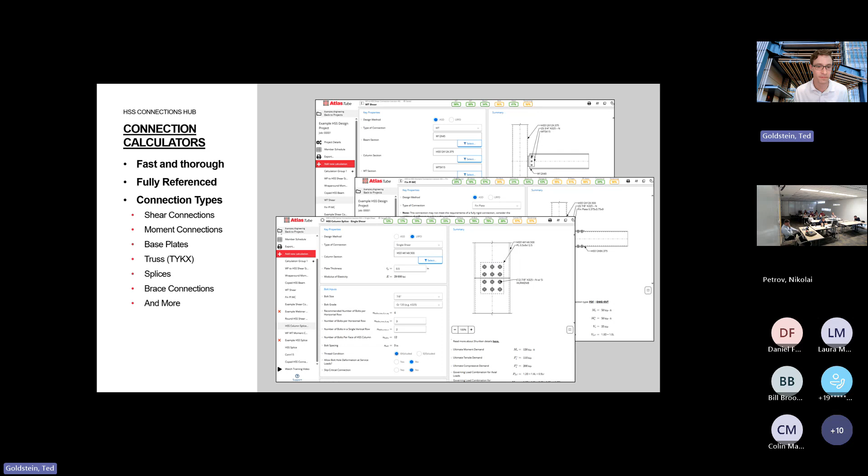The last big feature is a reporting feature. If you're doing this work for a client that wants a calculation package, especially if you're doing deferred connection design—I don't know if that's common in Alaska, but it's very common here in New York, less so on the West Coast.

You can quickly export a calculation report for the connection and put your firm's logo on there so it'll be as professional and polished as possible.

The diagram that comes with the report will be of your actual connection instead of just a generic detail of that connection type, so in terms of the scale of the members and the number of bolts, it will be representative.

With every single line of the connection, if we look at the rightmost page, every line has the appropriate code reference so that someone who's really digging in can find out where all these numbers are coming from.

So that's the Connections Hub. I've done presentations in the past where we dig into the specific user interface in more detail, so if you guys are interested, we can work with you to dig into that. Truth be told, structural engineers are pretty familiar with calculators—it's not rocket science to change the number of bolts in a connection—but to the extent there are questions, we're happy to jump in and provide support.

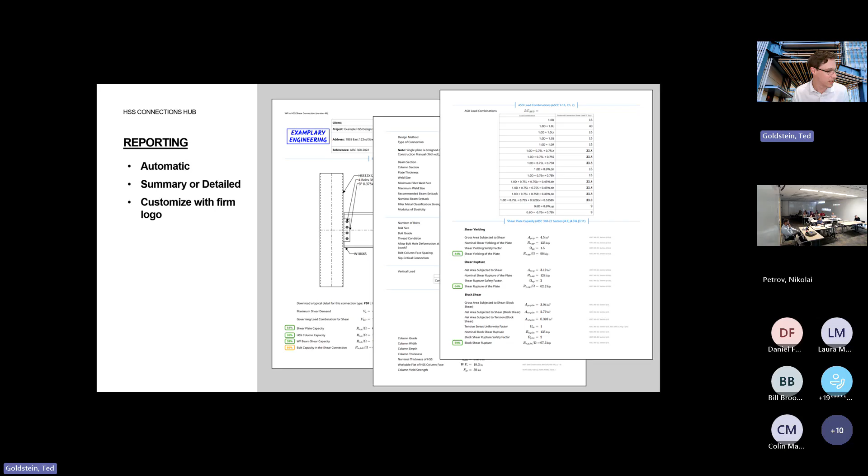So with that, there's the journey with Shuriken and the Connections Hub. I'm going to stop and open it up to some questions. And again, I really appreciate the time and the opportunity to be here with you guys.

So I've got a question right off the bat. It's Nikolai. Sometimes we use A320 bolts in low temperature applications, but usually we detail them as A325. Would this still work, or would they have to be installed not in sub-zero temperatures if frozen?

I think it depends on the application. If it needs to be pre-tensioned, I'd be reluctant to give any guarantees because we haven't done testing at those super low temperatures. If it's a snug tight application, then it will be fine.

I would ask, I assume those fasteners use an extra wide hex nut, same as an A563. Is that a fair assumption? I believe so. So for snug tight, or really any of these connections, I mentioned the importance of being able to take the torque of pretensioning. Very often that torque is zero, since friction does the majority of the work. Once the plates clamp together, given how the nuts are proportioned compared to the width of the bolt, very little of that torque actually transfers to the shuriken.

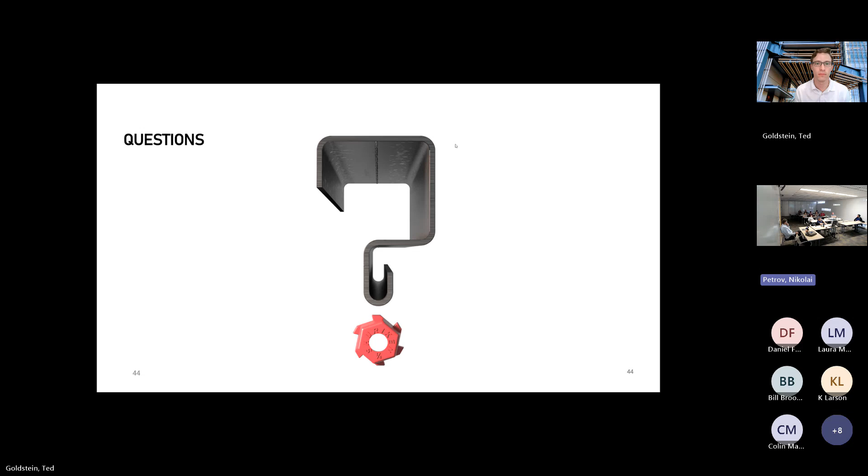Do you have any questions? I looked at the Shuriken—I guess it's a Japanese throwing star. That's where the name comes from.

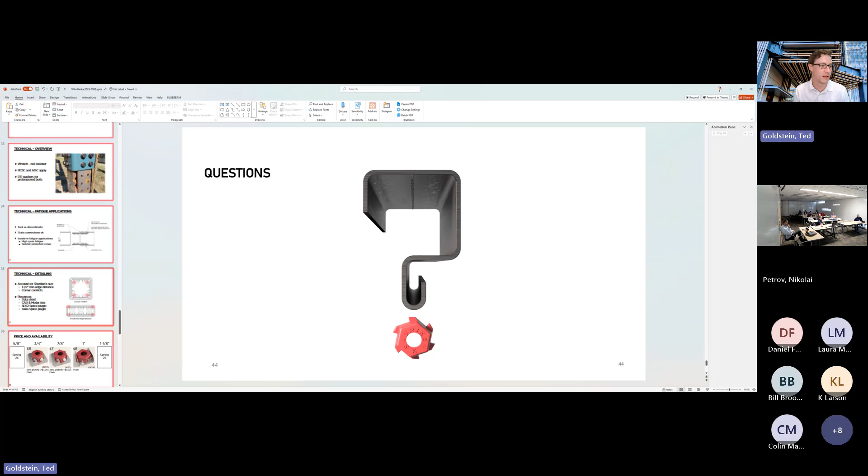If you look at the shape of the logo—let me put this up here—this view from below of the 3/4 inch size, that was the first size developed. That is the logo, and because it kind of looks like a throwing star, it got the name Shuriken. I'm sure the fact that I was sitting in Tokyo at the time probably had some subconscious contribution to the choice of name, but that is the story.

Cool. Any questions? I was just seeing if anybody online had any questions. I don't see any hands raised. All right, Ted, back to you.

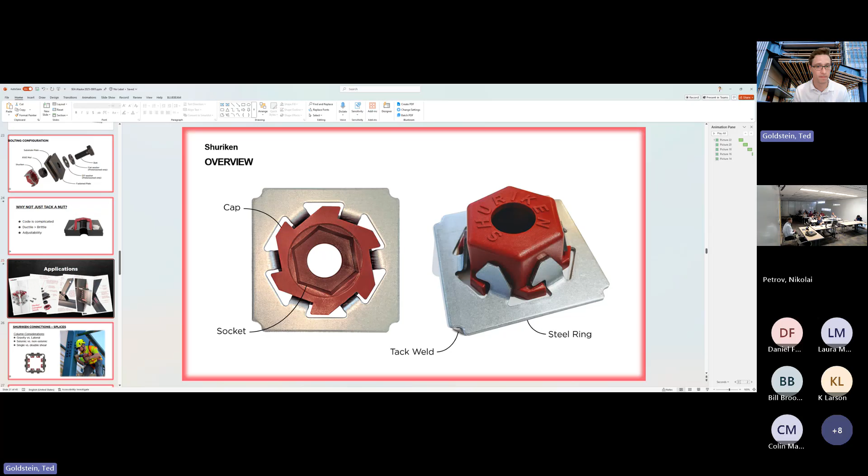I was just going to say, I showed some images of the various applications we've put together. I'm not sure if you have that PDF of the detail book at the moment, but I can send that out. We tried to make sure what we were drawing was realistic, but to a certain extent these exist just to get the imagination going. When we realized how much stuff we hadn't thought of, it became clear that just showing off splices was leaving people unaware of other ways it can be used. So we wanted to get imaginations going with that.